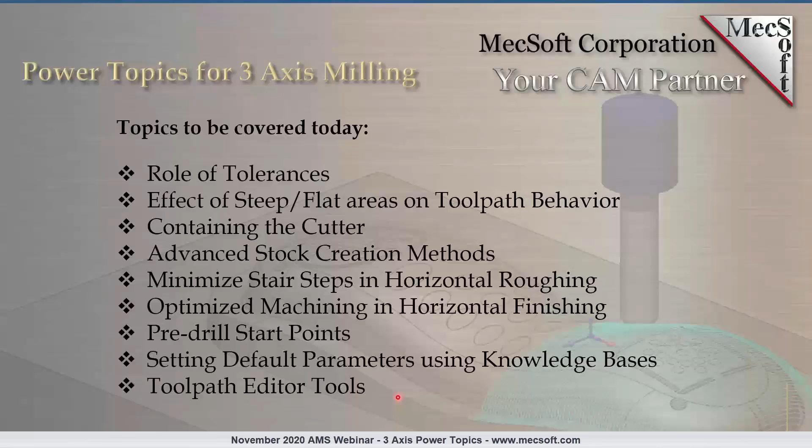We'll start by covering the first topic here, which is the role of tolerances. To demonstrate this, I'm going to first run through a few slides so you can see how tolerance affects your toolpath.

So the smaller or tighter the tolerance that you set, it'll reduce the chord segments, which improves the accuracy as you go smaller or tighter on the tolerance. This in turn results in more go-to motions, because the chord segments or distance between each point to point move of your toolpath is going to be much smaller. So depending on the part you're working on and the accuracy and finish that you need, you may want to set those tolerances accordingly in your roughing and finishing process when you program your 3-axis operation.

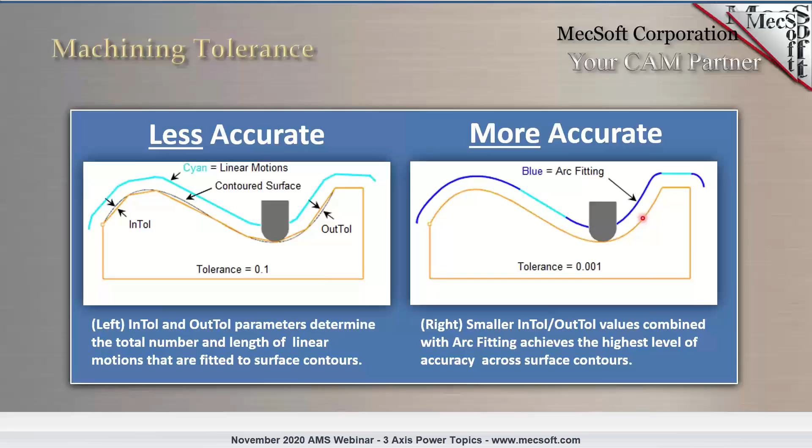Okay, so I have a core of a tray insert that is loaded in RhinoCam. As you can tell here, I have a few operations programmed. So the first thing we're going to take a look at is the role of tolerances.

So I have a horizontal roughing program. The part is in millimeter units. As we take a look at this toolpath, you will notice the effect of the tolerance, the chord segments are much longer or larger, as you can see here, with the default tolerance of 0.25 millimeters that's been set for the in-tol and out-tol, and the toolpath has been generated.

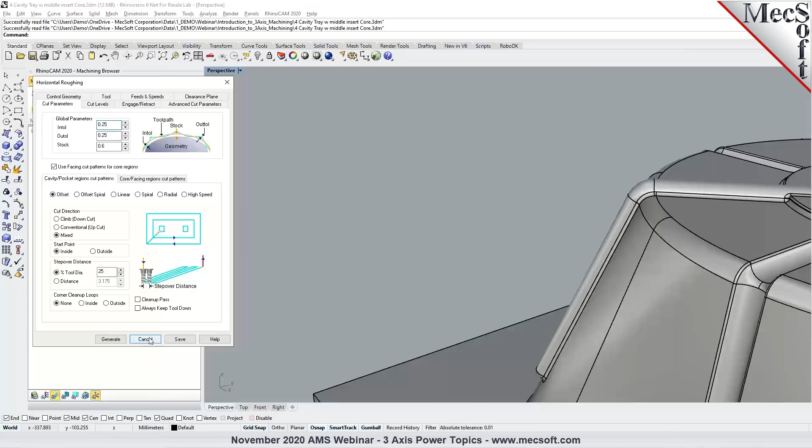So as we generate and simulate the toolpath, I'm going to run simulate to end, which is running through it, and you'll also notice the facets and the effect of the tolerance on the rough part in here.

Now, as we go back and tighten up these tolerances, I'm going to step through the levels before I tighten up the tolerance, so you can see for each of the levels the chord segments are much farther apart based on the tolerance settings that we put in.

If I go in and tighten up the tolerance to a value of 0.05 millimeter for our tolerances, you will notice the toolpaths are much smoother, resulting in much smaller chord segments and improving your quality of finish on the resulting part as you take a look at each of these Z levels in the roughing operation.

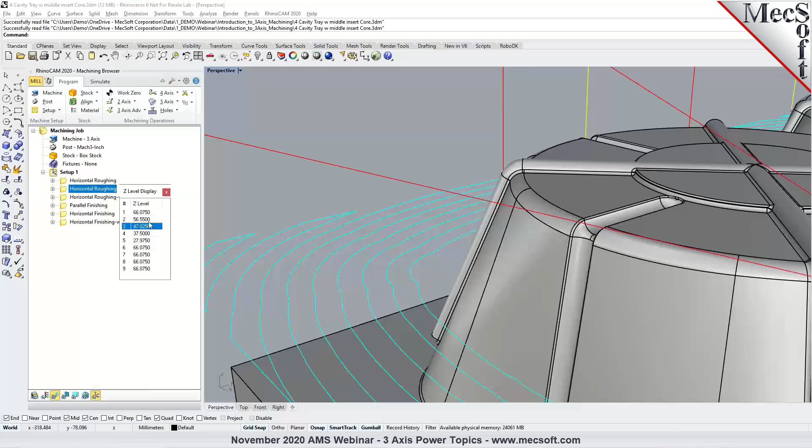Now the same goes with other operation types as well, finishing included. I'm just using the roughing operation as an illustration here for today's webinar, and I'm going to go ahead and run through the simulation for the roughing operation with a tighter tolerance.

So you will now notice the difference between the two, roughing with the slacker versus tighter tolerance, as you can see in the result of the simulation. This one you're noticing here is with a slacker tolerance, and this one is with a much tighter tolerance. Making the tolerance much smaller, tighter, will result in a higher accuracy finish, again at the expense of more lines of code, and the computation time would also be longer for a tighter tolerance.

Now, to fit arcs to your toolpaths, there are a couple of things you will need to do. One is you'd have to go into your CAM preferences and machining, and you would need to make sure output arcs as linear segments is not checked.

In your advanced cut parameters tab, you will need to set the arc fitting tolerance by selecting perform arc fitting, and you would specify the fitting tolerance to 2 times the tolerance that you specify for your in-tol, out-tol. So I have it set to 2 times, and then generating the toolpath will fit arcs to toolpaths wherever is feasible in the 3 principal planes.

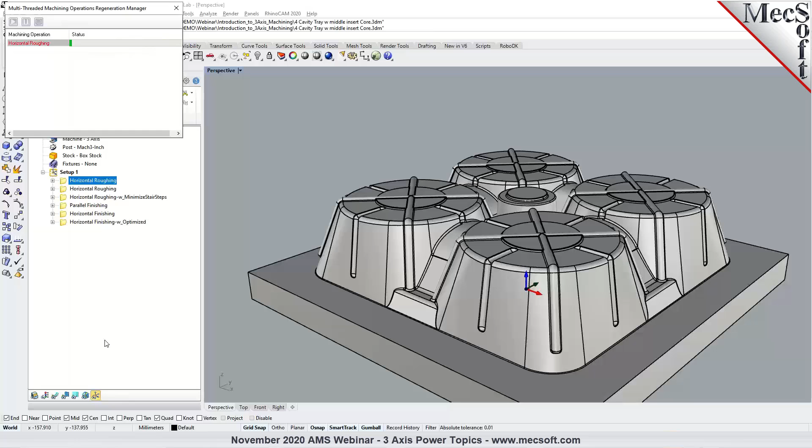So in this particular operation we've generated, we have a horizontal roughing, also known as Z-level roughing or roughing in levels. All of the toolpaths generated are in XY planes, parallel to the XY. You can see the arcs are being nicely fitted to the toolpath, and you can also set the maximum arc radius under CAM preferences and machining, depending on the max radius that your machine or controller is capable of handling.

Now I do have another example in here where you can see the same effect of tolerances. One with the slacker tolerance, you can look at the chord segments are much longer. With a tighter tolerance, it's more accurate and much smoother, resulting in a much finer finish.

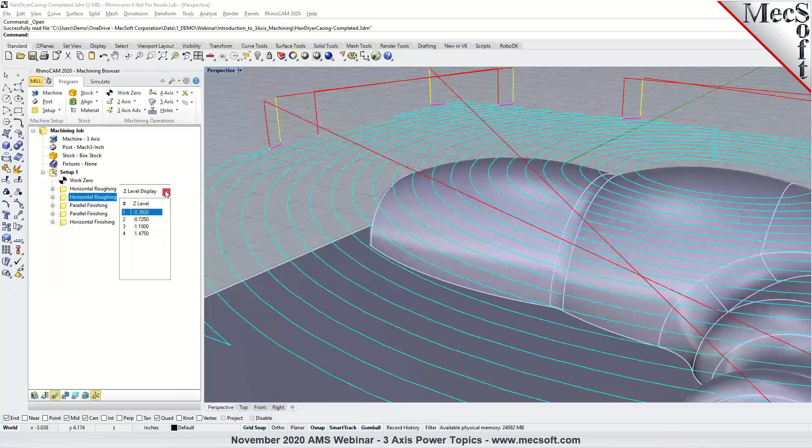Okay, so we will now move on to our next topic, which is the effect of steep and flat areas on toolpath behavior. To demonstrate this, I'm going to be using the same model here.

I have a parallel finishing operation program as part of the finishing or pre-finishing process. You'll notice that depending on the angle of cut specified in your parallel finishing - in this case, set to 0 degrees - the cutter traverses back and forth parallel to the x-axis.

As you run into steep areas on the model, you'll see that this leaves larger stair steps as the parallel finishing is riding up and down on these vertical walls.

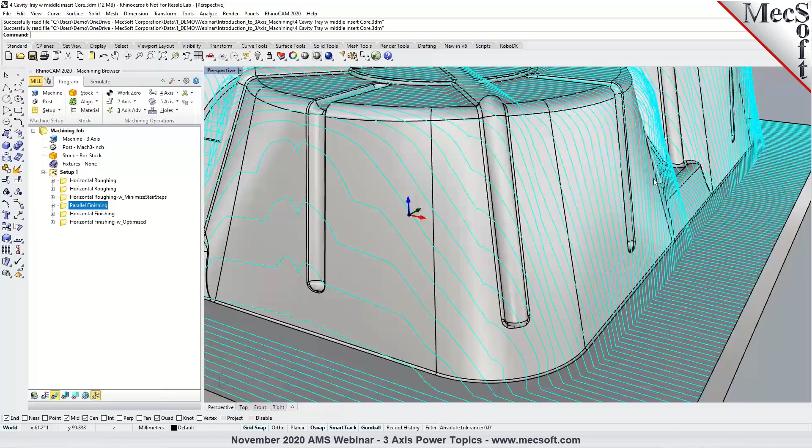Now, as you go along these sides, you'll notice it results in a much smoother transition in the parallel finishing operation. So to eliminate these steep areas and the scalloping you're noticing in the toolpath, you'll need to change the angle.

I just wanted to give an analogy of why we're seeing these jerky motions when going along close to the edge of a vertical surface. You can think of it as hiking along a very steep mountain, on the sides of the mountain. Even a very small change in your step could result in a large vertical drop. So that's what's happening here.

If you have a very steep surface and the tool is riding on the side of that steep surface, even a very small change in the normal direction of the tool can cause a significant change in the vertical axis of the tool direction. So that's what you're seeing.

So you've got to be aware of that if you're cutting steep areas like this, and if you go along that steep area like this toolpath illustrated here, you might see these jerky motions.

So thanks, Uday. Thank you.

So going along, as you notice, riding up and down on the walls is steep, but when you're going across, you get a much nicer transition.

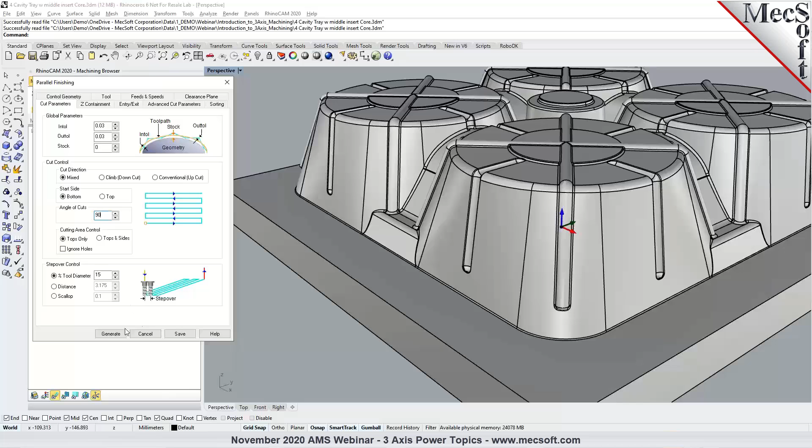So you can get a much cleaner finish on this side, but you'll notice the effect going along the steeper section on this side. You'd have to program one with a 0 angle of cut and one with a 90-degree angle of cut. You could contain them to specific regions by creating regions or selecting surfaces.

We'll talk about that later, but I just wanted to go over the effect of steep and flat areas on toolpath behavior with parallel finishing on this particular example.

Now I'm going to give you an example of the effect of steep and flat areas on a part where we can use horizontal finishing toolpaths, also called Z-level finishing. This particular part is much more free form or sculpted, where we don't have a lot of steepness or variation.

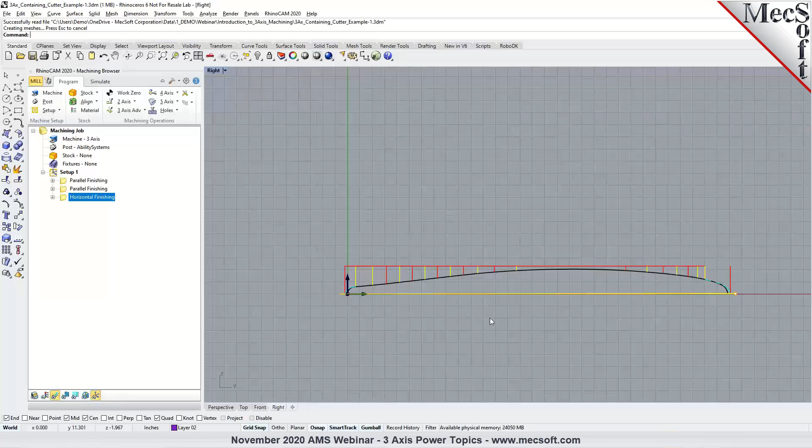Now, programming a part like this with horizontal or Z-level finishing is not the most ideal way, because Z-level is ideally used for steep sections - also known as a waterline finish, where you step down in constant Z levels. Since this part isn't too steep, programming Z-level finishing will result in much more gaps, spread further apart, even with a tighter step down distance set in the cut levels tab.

Conversely, I'd add that the part Uday showed previously would be better suited for horizontal or Z-level finishing rather than parallel finishing. So it's all dependent on the part shape or the configuration of the surfaces, and you've got to be aware of this.

Thank you. Thank you.

So the horizontal finishing has been generated on this particular part we looked at earlier, the core model. You can see the horizontal finishing generated on the part which is near flat, or we could call it freeform or sculpted, since there aren't too many steep areas.

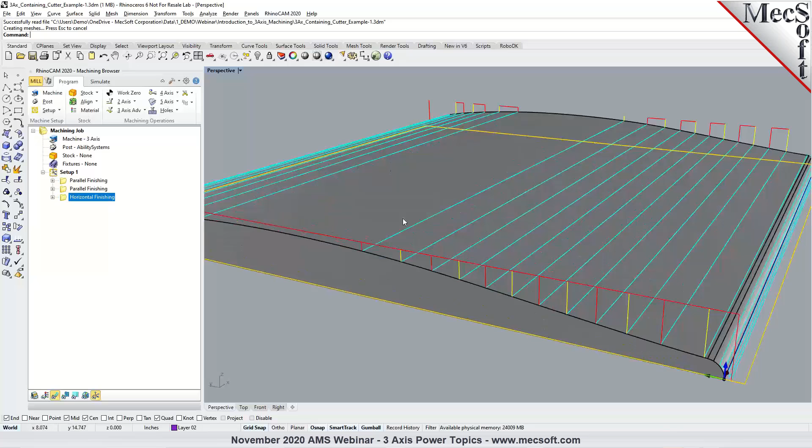Ideally, you would want to generate a parallel finishing toolpath or something similar on a part like this, as opposed to using a horizontal finishing toolpath. So a good rule of thumb would be, if your part is generally flat like this, you would use parallel finishing. And if your part is steep, then you would use horizontal finishing. That's a very good rule of thumb to follow.

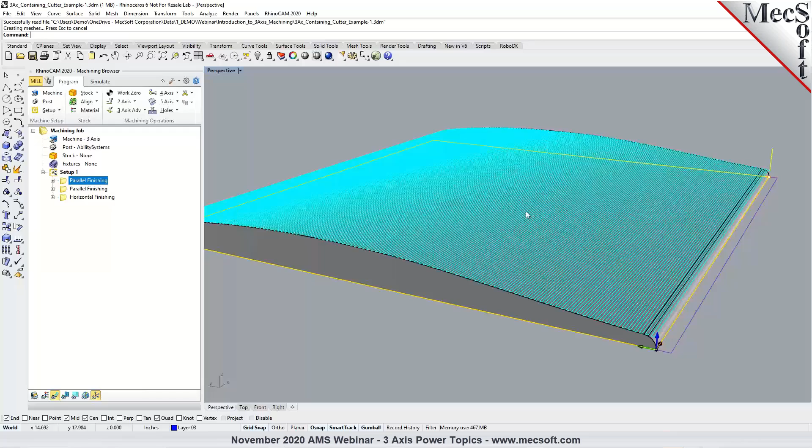To illustrate this, I'm going to be starting with this particular example, which we just looked at. Now, to be able to finish this part, you will notice that we have a region selected for containment, which basically extends up to the part extents in here. We have selected a containment region so that the toolpath can be generated for the entire part.

Now, as we select a containment region, the tool tip stays up to the region in here, as you can tell by looking at the toolpath and the toolpath display. The tool tip stays up to the region.

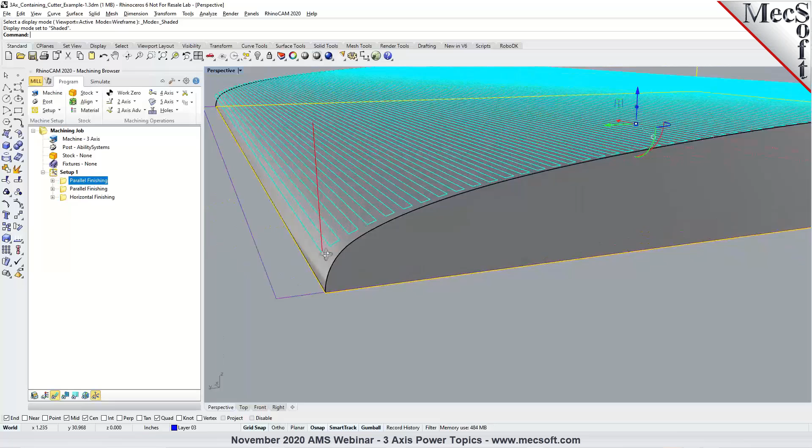So in this particular case, since we have a fillet or a radius surface towards the end of the part, you can tell that the cutter is not able to get all the way down fully on the side. So if I go into the toolpath viewer, you'll be able to see that the tool is not going all the way down on the side in here.

Whether you're using a ball mill cutter, the tool, you can take a look in here and see that it's not going all the way down. So in order to be able to cut all the way down on the side, we need to make sure that the region you're selecting is extended past the edge of the part by at least your cutter radius, if you're using a region or a curved region as your containment.

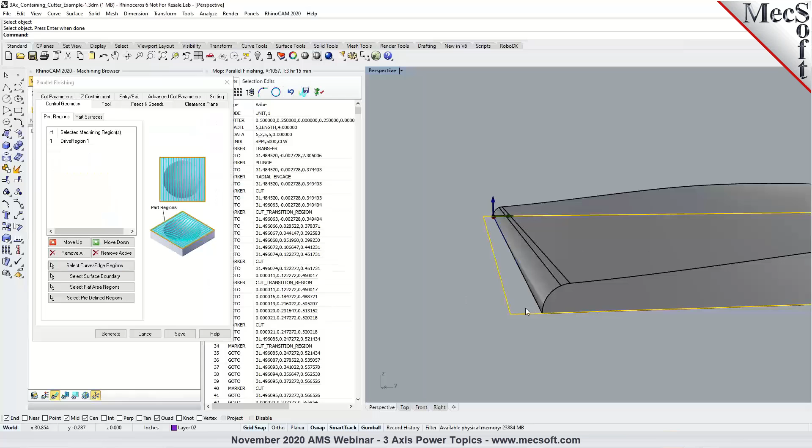So one of the ways you could do it is you can offset the region in your CAD. In this case, it was Rhino. I can offset the region and pick a region that's offset by at least the cutter radius and generate the toolpath. So you will see that the tool goes all the way down, cuts past it in here, goes past completely on the side.

Now, since I did not want the tool to go past on these sides, I did not extend the region over here. I just did an offset on one side, just along one of the directions. So on the y-axis here, the same goes over to the other side as well.

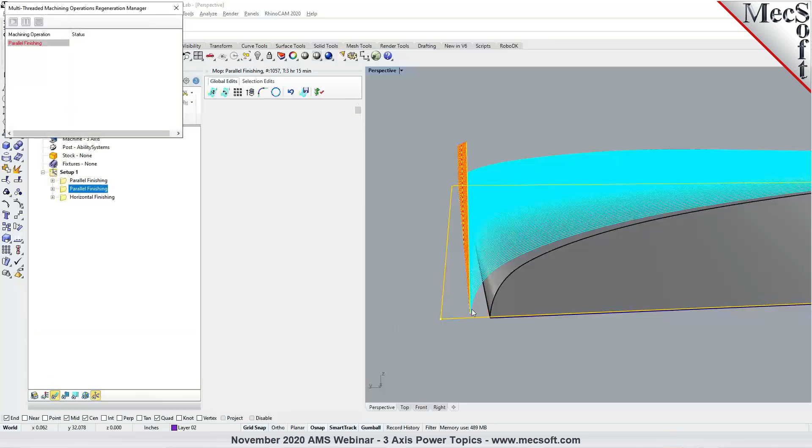Now I could apply the same when you're using cutting across at 90 degrees. You'll notice that the cutter goes all the way down, but it creates these retracts to the clearance plane. You're noticing this effect because there is no underlying geometry or surface for the toolpath to project down to. So basically when it gets down on the side, it retracts up to the clearance plane before it does a transfer.

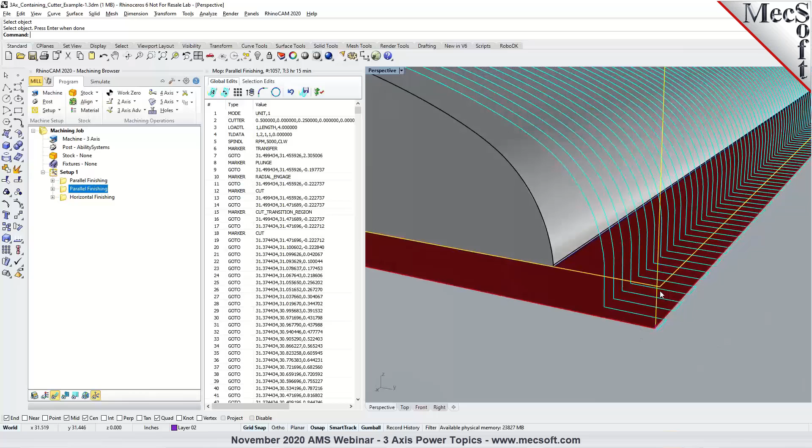Now there's a couple of ways how you can eliminate this. One of the ways is by inserting a plane. You can insert a planar surface, or it could be even a sculpted surface depending on the type of geometry you're working in. Generating or regenerating the toolpath will create a nice transition down to the floor of the surface that you created. And the toolpath stays contained to the curve that you've selected, which is the offset curve.

Now you can alter this plane in here. You can select it, and if you want to move it up slightly, in this particular case, I've chosen the plane to be down by the cutter radius so that the side of the cutter can fully get down on the side. As you take a look at it over here, I'm going to switch the tool to a ball mill. I had it on a flat mill for some reason.

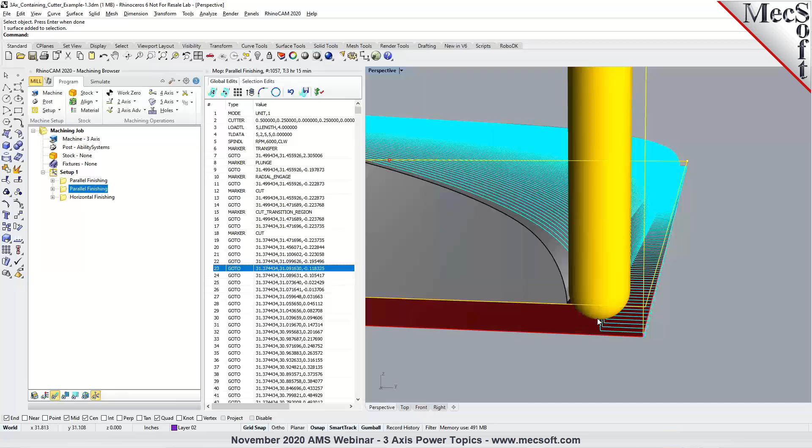So if you take a look at it here, it gives you enough room for the cutter to get down all the way down on the side to be able to cut it fully. So you want to make sure that you basically move the plane so it's at least past by the cutter radius if you're using a ball mill, so it basically clears all the way down to the edge.

If you move the plane up in the Z, I'm going to turn off the snap and just lower it down slightly below the part, and then regenerating the toolpath will automatically stay up to the plane.

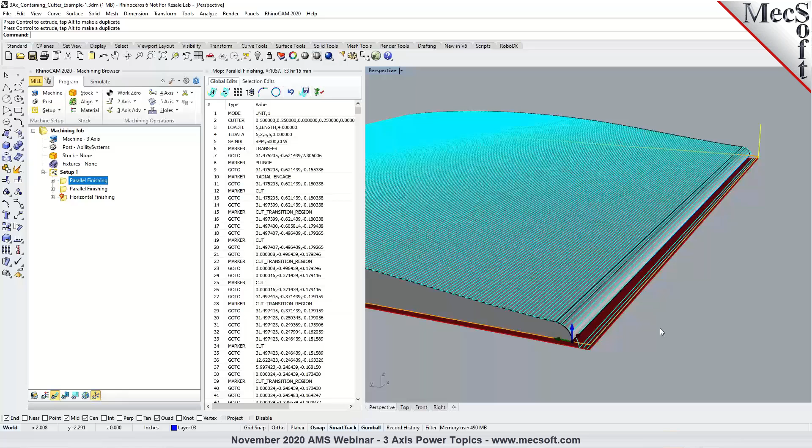The same thing goes whether you're cutting at an angle of cut of 0 or 90 degrees, you'll have the same effect. To be able to cut down fully on the sides, you'd want to make sure that you offset it by the cutter radius. That would be the minimum distance you want to offset away from the edge. This would be helpful in parallel finishing operations, for any type of part that you're working with. This is just an example to illustrate that.

I'm now going to go over a few other cutter containment examples.

You said a couple of things to eliminate the retracts. The other easy one would be to use the skim. Absolutely.

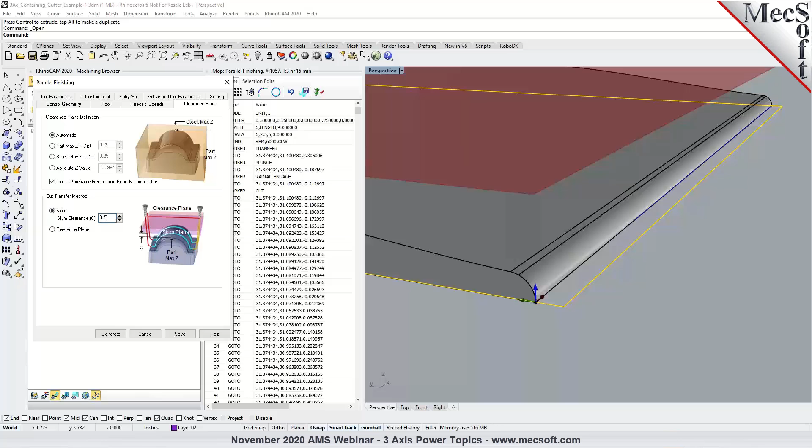So we'll generate this toolpath again. I apologize, I forgot, I missed it out. In the clearance plane, we have a cut transfer method. We can set it to skim or clearance. The default choice is clearance, so you can change that to skim and specify a small value. I can put in like 10 thousandths, and that'll basically just retract 10 thousandths above, resulting in a skim transfer and not retracting all the way out to the clearance plane.

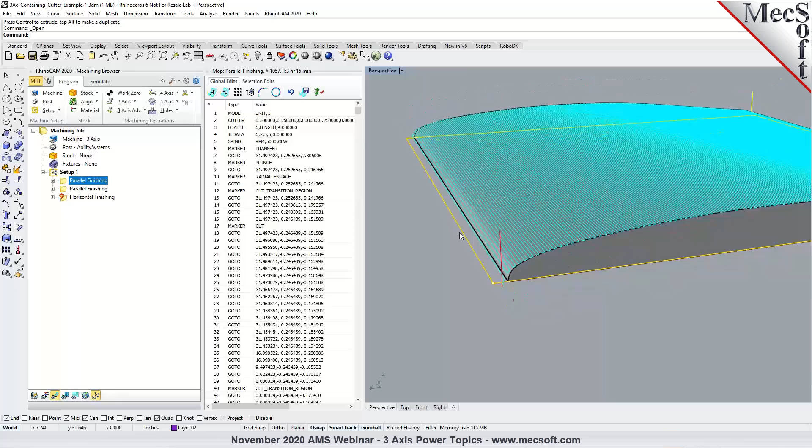The same thing can also be set whether you're cutting along 0 or across. In this particular case, you wouldn't have much effect on the skim clearance because you're going parallel to the x-axis, which the angle of cut is set to 0. You'll see the effect more when you're cutting across, as you're riding down the fillet or the radius here.

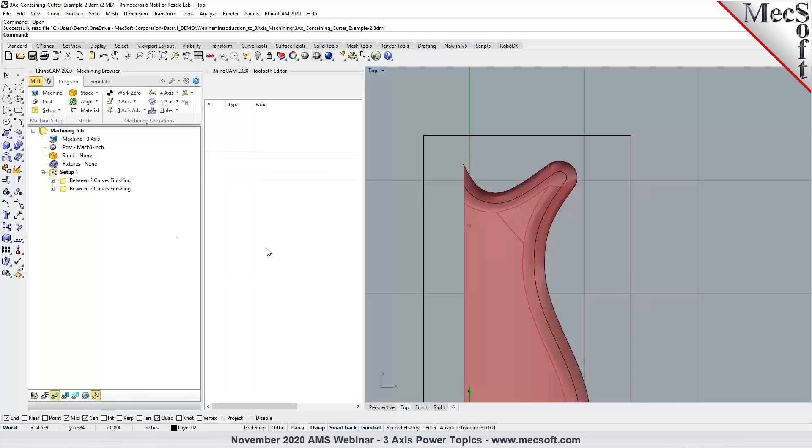Okay, I'm going to go over to the next example, which will cover the effect of containing the cutter. So here I have basically a half section of a guitar body, and these fillet sections here are steep sections. I have used a method called between two curve machining to program this.

Now this between two curve machining is part of our advanced 3-axis methods. It's available in our Pro and Premium configurations of our mill module. The toolpath morphs or flows between the two curves, and the toolpath is being projected to the 3D model.

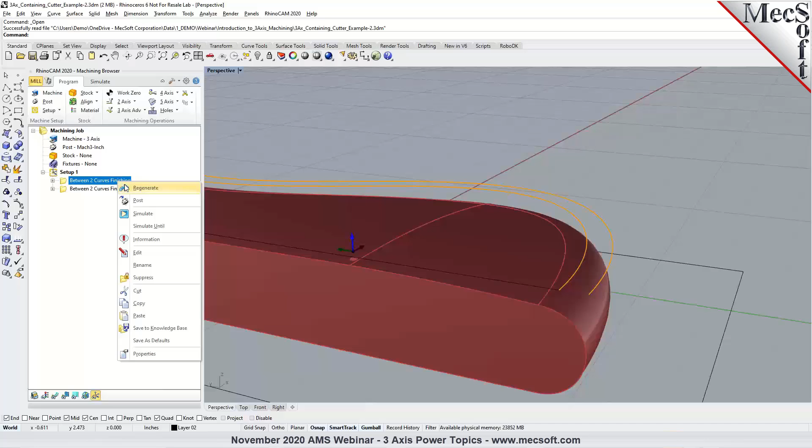In this particular case, I have selected two curves. One curve is on the edge where the fillet begins, and the other curve is where the fillet ends. Selecting these two curves and generating the toolpath will result in this toolpath.

However, the cutter is not able to get all the way down on the side. So similar to what we did in the case of parallel finishing, we will need to create a curve that's offset away from this edge by at least the cutter radius, and then generate the toolpath.

Generating the toolpath here, you'll notice that the toolpath goes past the edge and cuts all the way down. However, the toolpath is riding up and down, and since there is no surface or geometry to project down to, you're going to see this shakiness in the toolpath because you don't have any surface geometry or part geometry underneath it.

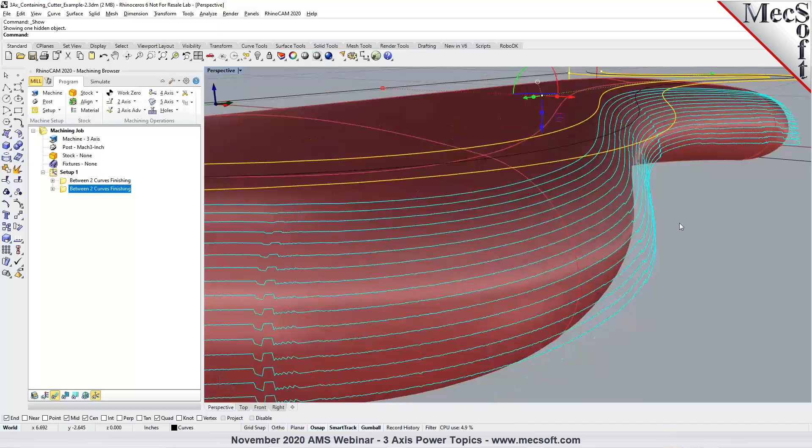So again, creating or inserting a surface at the bottom. The surface could be planar or sculpted, and generating the toolpath will eliminate this shakiness that you're noticing with the between two curve machining operation.

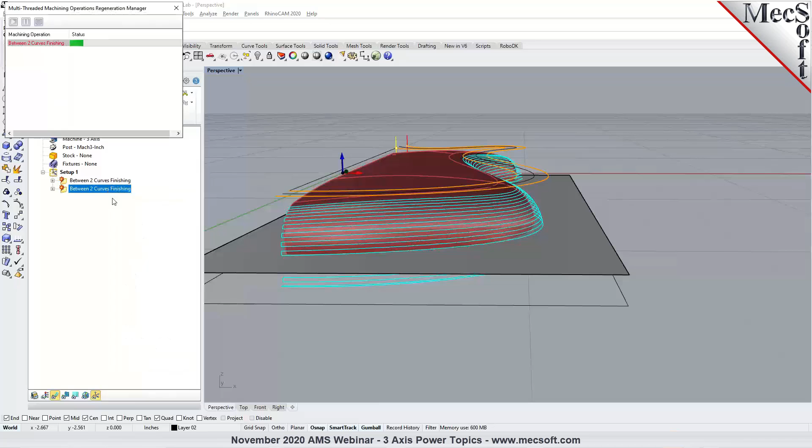This plane that you create can be set wherever that's appropriate. If you only want to go halfway past the model, I can move the plane up in the Z axis and then regenerate this toolpath, so the toolpath will not cut beneath the plane.

The next example we're going to take a look at would be one with a horizontal finishing toolpath, on a similar type of model. Again, we would like the cutter to go past this edge where the fillet ends, so you would want to make sure that you create a curve and offset it away from the edge by your cutter radius.

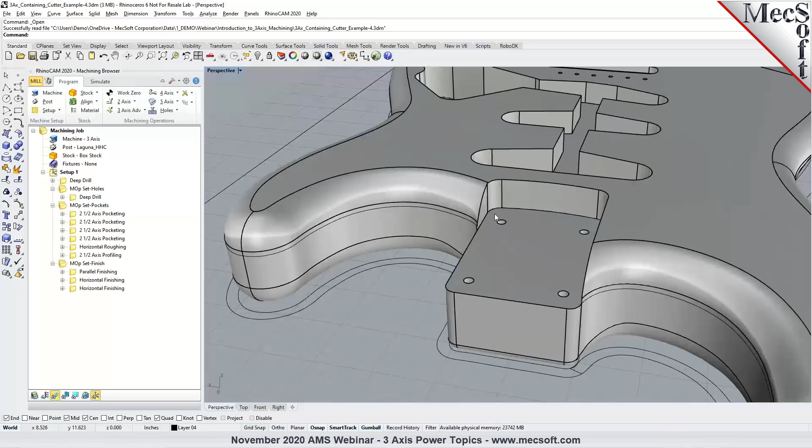In this particular model, we would also want to make sure that the cutter stays away from this pocket region. So what we have done here is created a closed curve region that stays away from the neck pocket of this guitar body.

Generating your horizontal finishing toolpath by selecting that particular curve region not only cuts and finishes the fillet radius all the way down to the bottom, we also have a Z containment specified in the cut levels, so as not to cut below a certain Z depth. It also stays away from the neck pocket.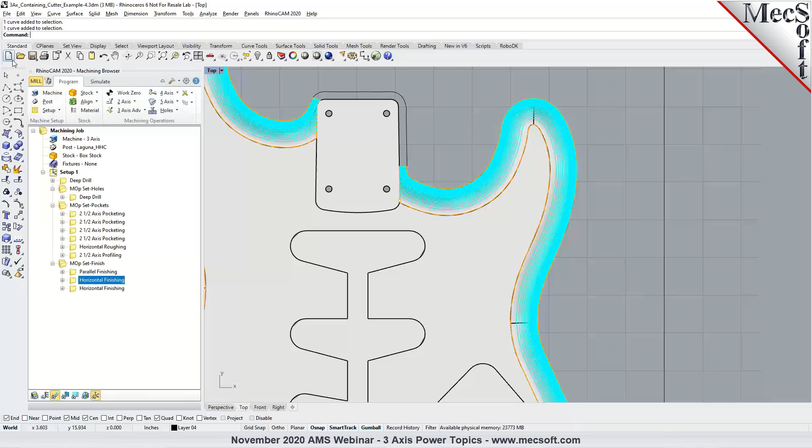So you could create these curve regions to contain the cutter to specific areas when generating your 3-axis toolpaths. Now let's go ahead and take a look at another example.

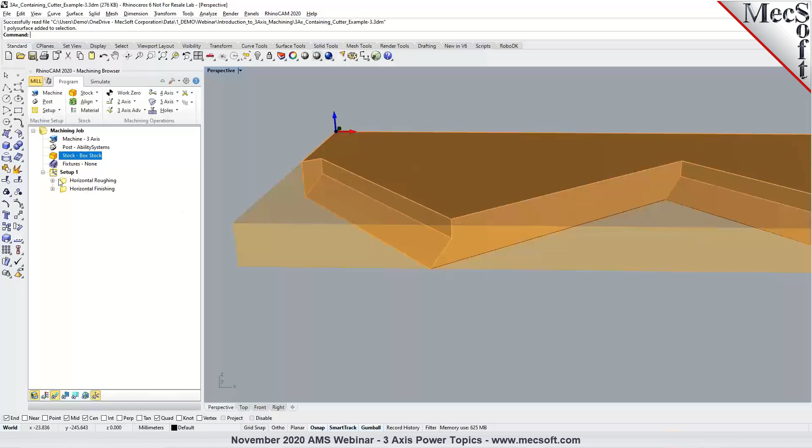In this particular example, you can see that the part has vertical walls in most areas, except there's a draft in two of these sections. So we've selected the silhouette around the part as a containment region, as we have the stock defined as a rectangular piece of stock, a box stock. So to contain the cutter just to the part extents, I've chosen a containment region that represents the silhouette extents around the part geometry.

Doing so will result in the cutter not being able to get all the way down on the sides. So if I go back and run a simulation, you'll see that the cutter is unable to go fully down to the bottom, and it leaves more material.

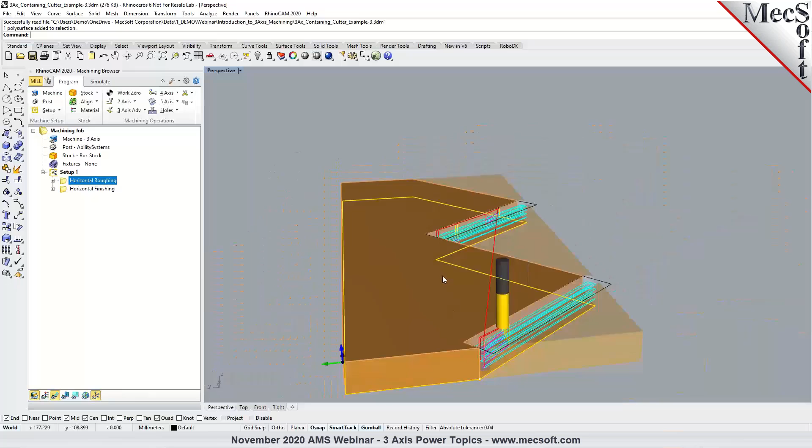Now, to be able to effectively program this, you would need to create a region and offset it out in the areas where you need to cut all the way down to the floor. So I'm going to go back and reselect my containment region. I have two rectangular regions drawn here, and generating the toolpath will allow the cutter to go all the way down to the floor.

So the roughing operation takes into account the stock that's being defined and looks at the part geometry where the material needs to be removed.

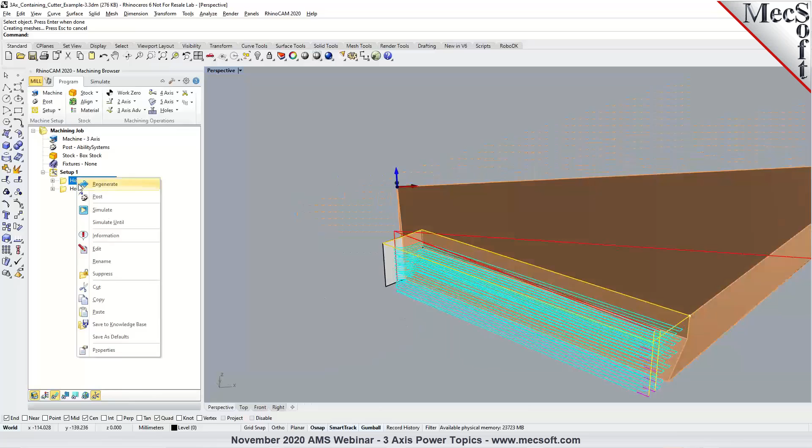Now, if you do not want the cutter to roll over around this edge, you could insert or create a simple surface like a wall here, and regenerating the toolpath will treat this also as part of your part surface and avoid the cutter from rolling over.

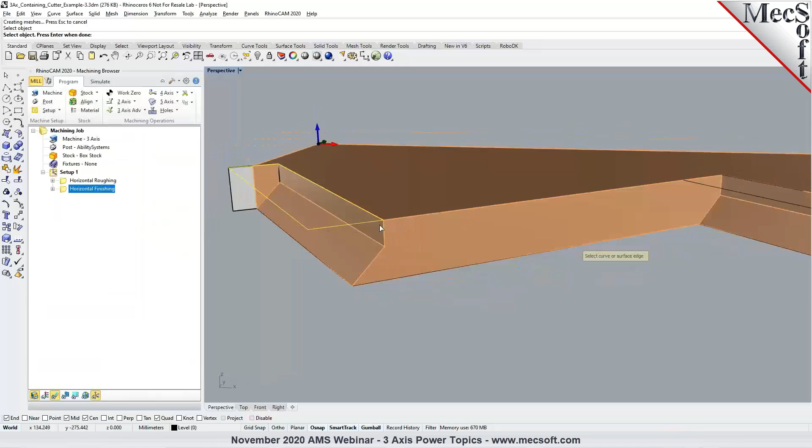Now the same technique can also be applied with finishing. In this example, I have a horizontal finishing programmed, and as you can tell, the cutter is not able to get all the way down to the bottom on this drafted or tapered wall in these two sections. So we will go ahead and modify and reselect the region, the one we've offset here, pick these two and generate the toolpath.

So this allows the cutter to cut all the way down on the side.

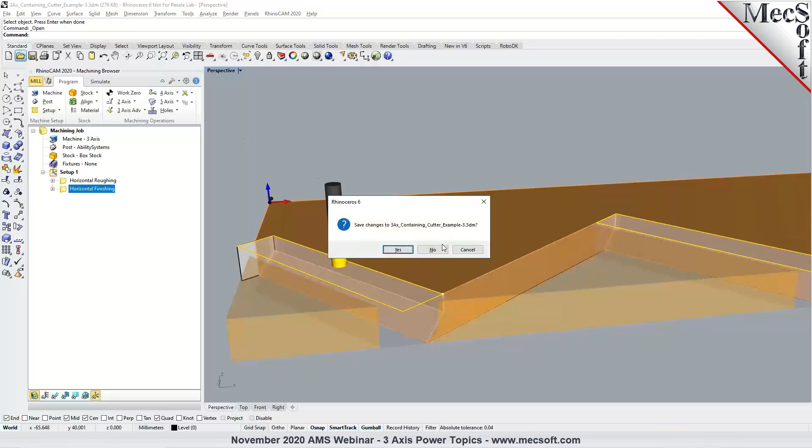I think the main takeaway from this region and containment section is that you can get quite creative with creating geometry and using that in machining for containment. Not only regions, not only curves that we call regions, but also surfaces, containment surfaces like the plane that he created. You're not necessarily restricted to planes—you could do sculpted surfaces as well. So you can be quite creative based on the type of parts you're machining. That would be the biggest takeaway from this section.

Thanks, Uday. Thank you. Also, we could select part surfaces as control geometry. In this example, I'm going to use a 3-axis radial machining toolpath. We can pick part surfaces, and you can actually select one or more surfaces.

As you specify a tool and generate the toolpath, based on what you set for the surface extent condition, you can have the toolpath either stay onto the surface, go past it, or keep it to the surface. So you have three different controls here.

Surface extent on means the tooltip stays up to the edge of the surface. Selecting past will go past by the cutter radius and automatically checks for the adjacent surfaces—it automatically gouge checks for adjacent surfaces.

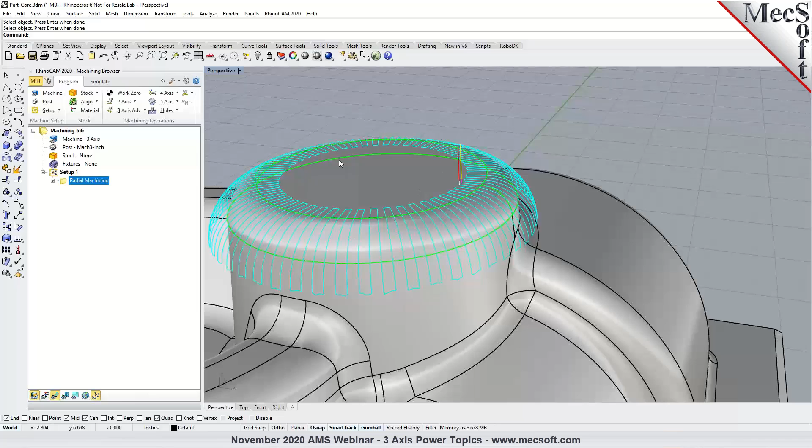So you can do surface selections, not just curve regions. You can also pick surfaces as part surfaces for your containment regions, and choose the surface extent condition to past, on, or to, depending on what you're looking to accomplish.

Okay, so we'll be moving on to our next topic: advanced stock creation methods. There are several different ways we could create stock geometries. With our Pro and Premium configurations, we have 3 additional stock types: part offset stock, extrude stock, and stock from selection. We'll be covering these three.

We've already covered the other stock types in our earlier webinars, so today we'll be focusing on part offset stock.

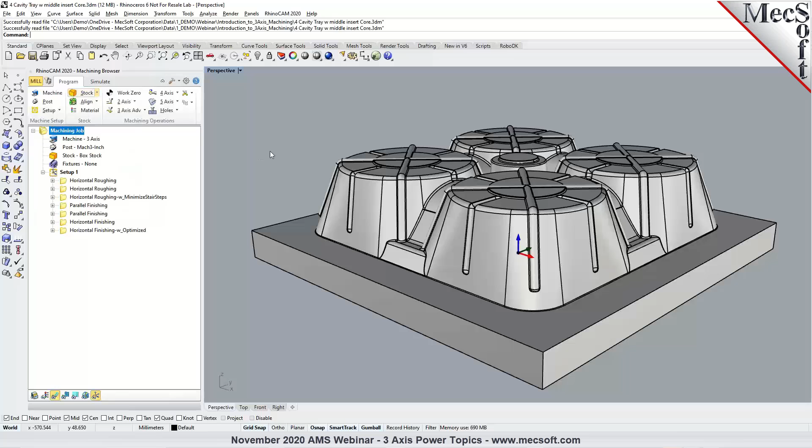The part offset stock is useful when you're working off of your casting. If your initial stock is going to be a casting you're working out of, rather than creating a box stock and roughing it out, your casting would typically be an offset of your finished part itself. You can specify a radial offset distance in the part offset stock, and picking OK will create a stock that's a true 3D offset of your actual part geometry.

This particular part is in millimeter units, so I put in a radial offset distance of 0.5 millimeter. I'll display the stock visibility, and if you go to the simulate tab, you'll notice the part offset stock is generated. When I create a roughing toolpath, the part offset stock is what's taken into account for generating the toolpath, so you're minimizing unnecessary cuts or cutting in air, making it much more effective for your finishing process.

The part offset stock is available in Pro and Premium configurations of our mill module.

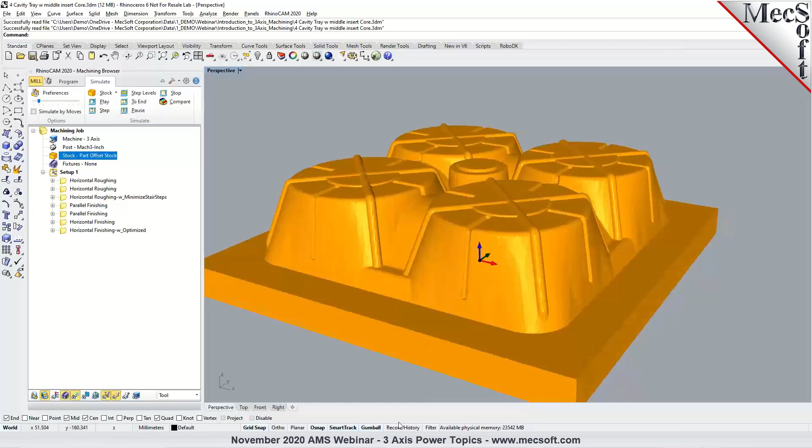The next stock types we will cover here today are stock from selection and stock from extrusion. I'll cover those two in just a moment using another example.

In this particular part, what I have here is a core model. You could be working with stock materials like MDF or foam that may be stacked up to form the actual shape of your part. You could model those in your CAD—here it's modeled in Rhino—so basically I have a stack of material stacked up where there are just features that need to be machined, saving your raw stock material for milling.

You could define your own stock or model your own stock, then place it on a layer in your CAD. In this case, I've created a layer called stock and placed this solid model on a new layer. I could highlight or select this geometry, then go into stock and select stock from selection, which will create a stock from the selections you made.

This feature, stock from selection, is available in Pro and Premium configurations of our mill module. A few things to mention: the geometry you're selecting has to be watertight, meaning there aren't any open edges. It needs to be a closed poly surface or a closed mesh—we could select either closed meshes or closed poly surfaces as geometry for defining stock from selection.

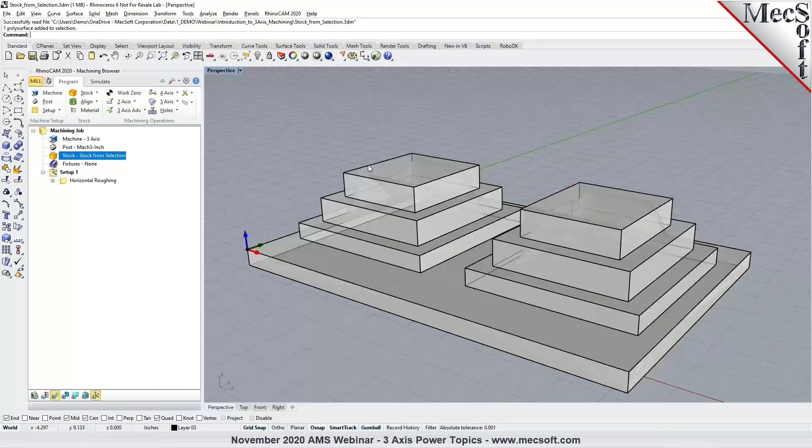Once you've defined the stock, it's now displayed in RhinoCam. The next step is to make sure you hide this solid model, or if it's on a different layer, turn off the layer visibility. When you do, you're actually viewing the part, and as you select setup and highlight stock visibility, you can see both your stock that's defined and the part.

Before you create a roughing operation, make sure you toggle off the visibility of the actual solid or mesh geometry used for defining your stock. Generating your toolpath will compute it based on the stock you created, so you're not cutting air, saving a lot of time and material. When I run a simulation, the toolpath is generated based on the stock from selection here.

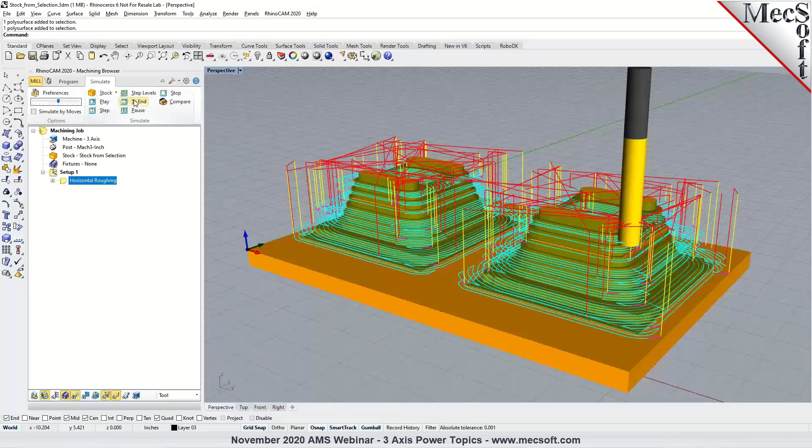When you're working with large scale models, and if you have stock made up of different shapes, you can model those stock shapes in your CAD and then generate the toolpaths by defining stock from selection. So there's a roughing process generated using stock from selection.

The next type of stock geometry I'd like to cover is stock from extrusion, also known as region stock. Let me delete the stock here. Stock from extrusion or region stock can be created by selecting planar curves—you can have one or more curves created. You need to make sure the curves are closed, and you can select these curves. I can hold Shift or Control to multiple select; if you're working in Visual CAD/CAM, you can use the Control key.

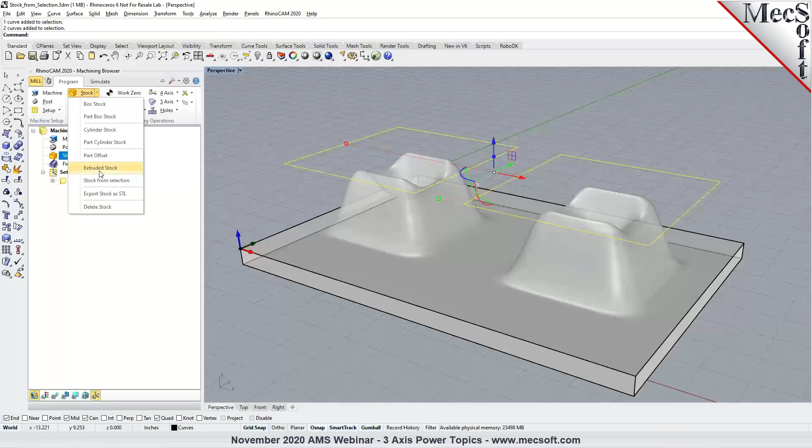In Rhino, you can Shift or window select curves and go up to stock and use extrude stock. The stock is basically an extrusion of the curve geometry you selected. You could specify a high and low Z, or automatically it'll determine the high and low Z based off the part. In this case, I can set the low Z to 0, pick OK, and the extrude stock or region stock is created. This feature is available in Pro and Premium configurations of our mill module.

Generating the toolpath will compute it based off the stock geometry that's been defined. You can see there aren't any toolpaths generated outside of the stock extents. Again, this is another way of defining stock for your roughing process.

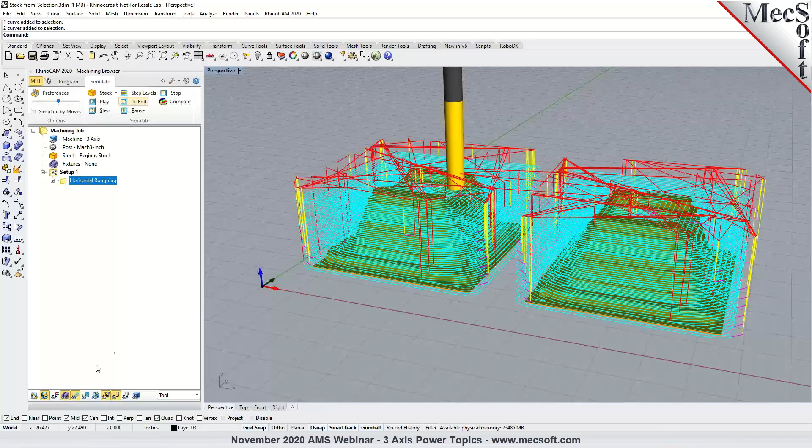You could also have a nested region for stock. For example, if I need to draw a geometry, I can put a hole in here and move it up to the same plane where this geometry is located. I could select these two curves and define stock from extrusion, so a stock you define can also have a hole or bore on it. With extrude stock, you can select multiple curve geometries to define your extrude stock.

We're now going to move over to the next topic, minimizing stair steps in horizontal roughing operation. I'm going to switch back to our original example, the tray core model. We've generated a roughing operation already and looked at its simulation earlier. You'll notice that with the roughing operation we've created, it creates stair steps like Z-level roughing, with large step downs for each cut level.

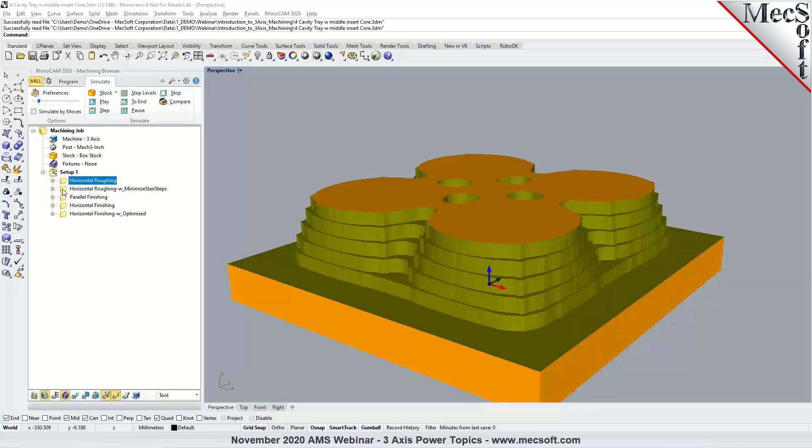One way to address this is to minimize these stair steps in horizontal roughing. This is a new feature available in our latest release. As you go into the roughing operation and go to the cut levels tab, you'll notice the minimize stair step option is available. This feature is available in Pro and Premium configurations, and you can specify the intermediate step down distance—setting it to 25% will be 25% of the step down distance.

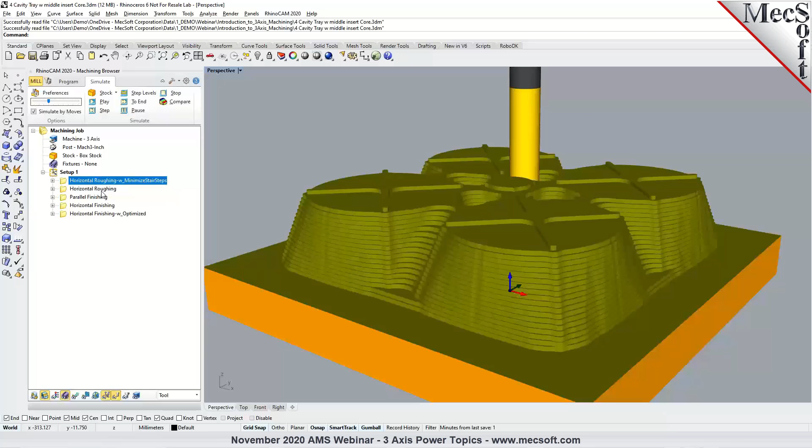Generating the toolpath will create the roughing toolpath in Z levels, then go back and clean up the stair steps, similar to a re-roughing operation. In the simulation, you'll see it does the first level and then works its way up to clean up and minimize those stair steps. Here's the simulation with minimized stair steps compared to without. This is an efficient way to bring the stock as close as possible to the net shape of the finished part in roughing, making it easier on the tools for pre-finishing and finishing.

Again, this minimize stair step option is available in the cut levels tab and is included in Pro and Premium configurations of our mill module.

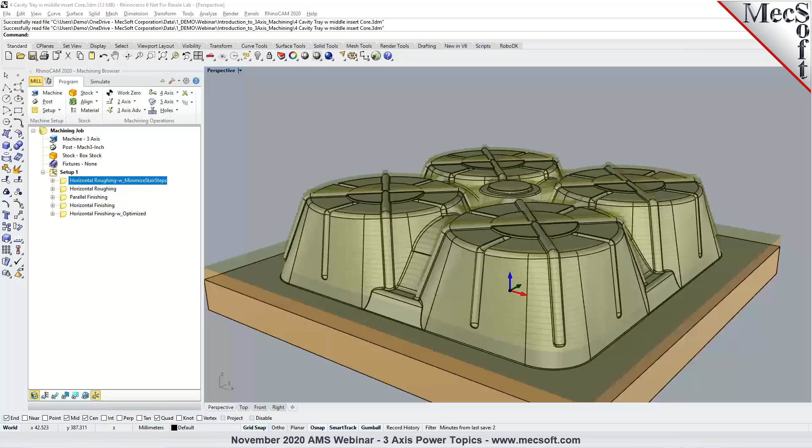We're now going to move to our next topic, optimized machining in horizontal finishing. Most of us have used horizontal finishing for finishing steep areas or Z-level finishing. Now if you have parts that also have flat sections you'd like to finish along with the steep sections, you could go into the horizontal finishing operation and select optimized XY machining. Selecting this and generating your toolpath will also generate toolpaths for the flats, resulting in an offset cut pattern.

As you can see, the optimized machining is generated on these flat sections on the top of the core as well as on the floor. I'm going to bring in another example where you can see the same thing in a cavity, how it works inside a cavity as well.

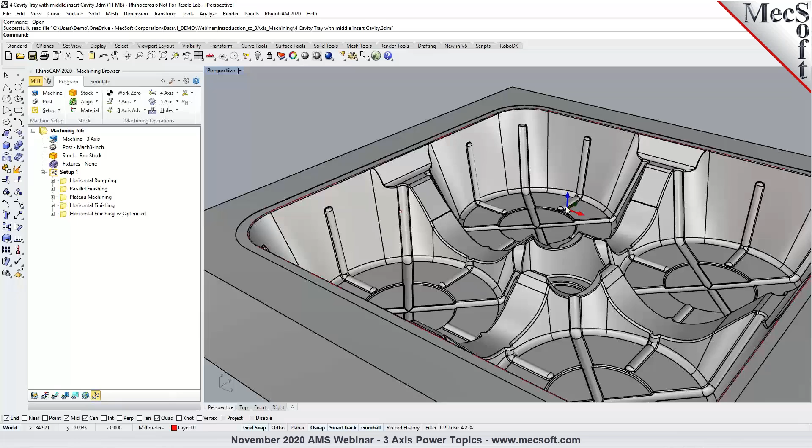So I have the cavity for the same tray part, and there's the horizontal finishing with optimized compared to without optimized. The optimized machining can be used for machining flat areas as you're stepping down in levels, generating your Z-level finishing toolpath. So to finish both steep and flat areas, you could use horizontal finishing with the optimized XY machining.

So there was a question on the minimized stair-step roughing. Can't you do that same thing with a smaller DZ, or delta Z, for each cut level? And maybe you can explain the difference between using very small cut levels to get that same effect as opposed to using minimized stair steps. Sure, we'll certainly do that, thank you.

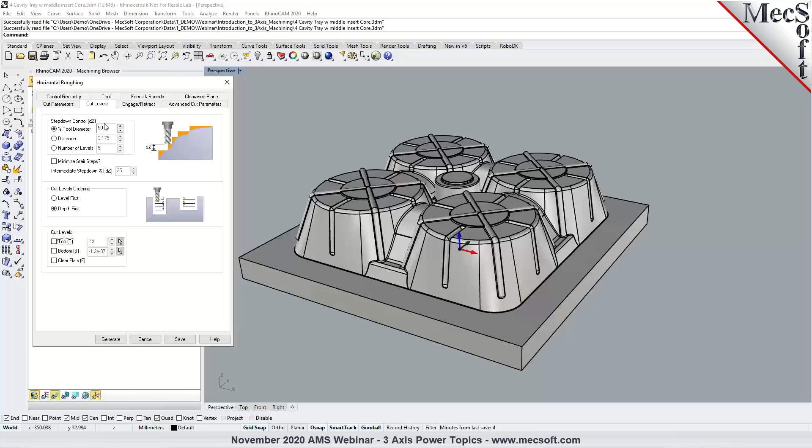So if you take a look at these two operations, I'll go over the information. You'll notice that the horizontal roughing with the current step down results in about 7,300 plus go-to motions. If we program the horizontal roughing with a much smaller step down, you're basically roughing the entire area of the stock and part with a much smaller step down, which results in exponentially much longer toolpath generation times.

If I set this to 10% tool diameter for the step down for each of the levels, you're basically roughing out the entire part at a much smaller step down, which adds more to your machining time. So it's probably much more efficient to use a larger cutter to clear most of the material out and then work your way up as you clean up the area.

So here I've used a much tighter or smaller step down for each of the levels. This adds much longer toolpath generation and machining time versus using minimized stair steps, where you generate it initially with much larger step downs, and then work yourself up to clean up just those sections around the model, like a re-roughing operation in between those stair steps.

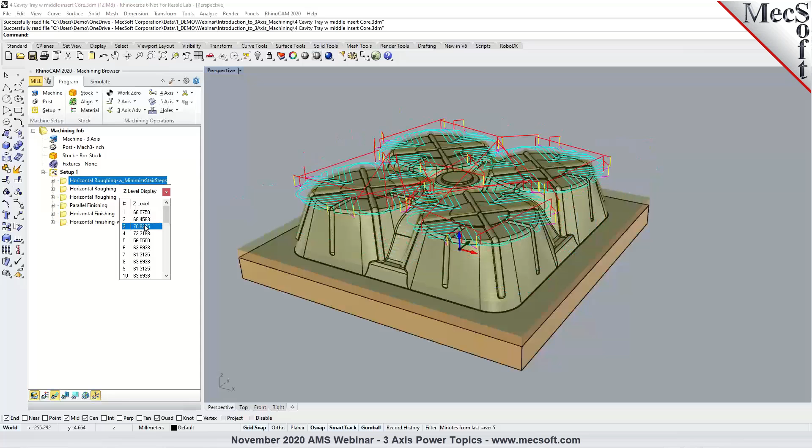So if I may add to that, what's happening in minimized stair step roughing is you're taking the maximum possible depth of cut with your cutter first, removing a bunch of stock with the maximum step down your cutter can allow. Then we use that in-process stock, since you've already cleared out a lot of material, to only go in and whittle away the amount you haven't removed in the preceding Z levels. So it's quite different from using a much smaller delta Z and machining the entire stock model.

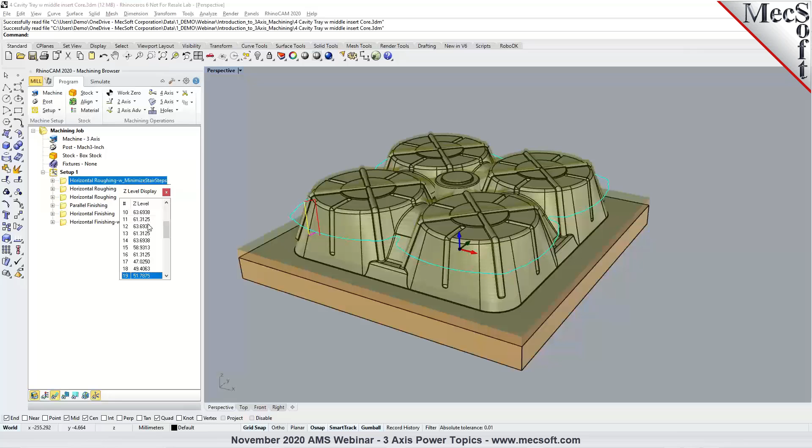Because if you're doing that, you're actually cutting the entire stock model for each delta Z. That's a significant increase in the number of toolpath points, that's what Uday is pointing out. So comparing the two roughing operations here, we're at 7,000, and if I use a delta Z of 10%, you're almost looking at 7 times, or just under 7 times, as many points, which exponentially increases your machining time. So minimized stair steps is the way to go, reducing the delta Z between each stair step so it does a re-roughing operation.

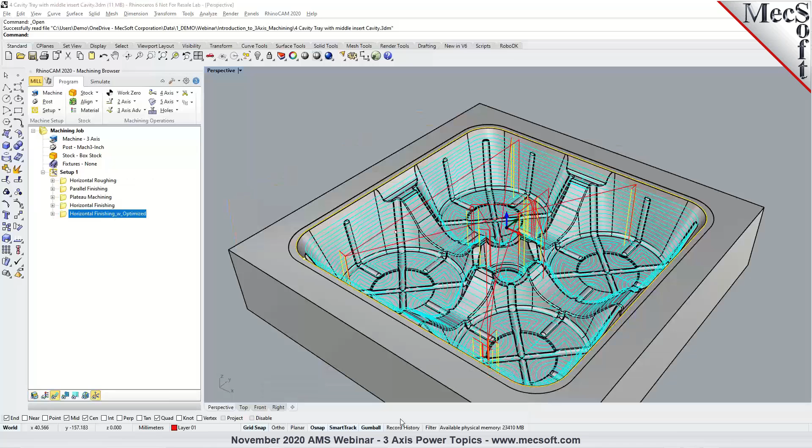Okay, so we'll move over to the next topic, which is how to use pre-drill points in 3-axis operations. In this example, I'm talking about a roughing operation. Considering we have this cavity that we need to mill, we'd like to pre-drill a hole so that makes it easier for the roughing process.

So I'm going to insert a hole machining and drilling operation to start with. I'll pick a drill point here, or I could pick a circle. In this example I'm using a drill point. We'll use a tool for the process, specify a drill depth, and generate the toolpath. So I'm drilling down 40 millimeters deep with an end mill, or it could be with a drill bit.

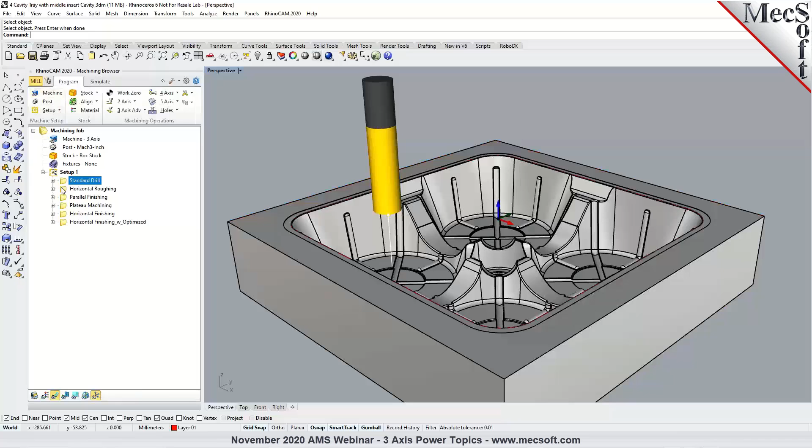So once we've done the drilling process, we'd like the cutter to engage or enter at this pre-drilled location at the start of the roughing operation. If you generate a horizontal roughing operation, the roughing toolpath automatically figures out the best possible location for the entry or ramp motion.

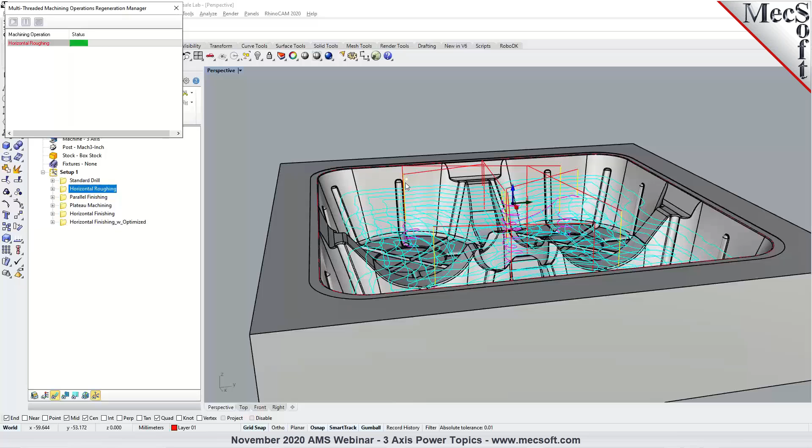However, if you wanted to use the location of the pre-drilled hole, you'd go ahead and edit the roughing operation, then go to the Start Points tab under Control Geometry, click Select Start Point, and pick the start point you used for your pre-drill operation. Now generating the toolpath will plunge or create the ramp motion at the point you chose for your pre-drill location. So it's automatically going to move your entry to the location of this pre-drill point, giving you control to specify where you want the cutter to enter on the roughing.

Now this can also be done for both roughing and re-roughing operations, picking the start point, so the cutter ramps in at the pre-drill location for each of the cut levels.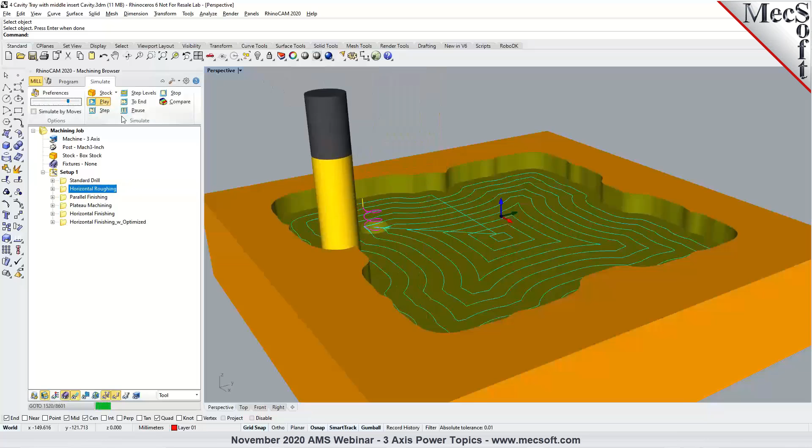All right, so let's move over to the next topic here in today's webinar, which is setting default parameters using knowledge bases. A lot of the times as we program our machining operations, we would like to use a certain set of parameters. When we go up to the machining methods, in this case 3-axis, if I choose horizontal roughing, I would like to use a certain set of parameters. For example, for the clearance plane, I may want to use stock max plus a distance of, let's say, 5 millimeters. I would prefer to use a skim clearance at all times.

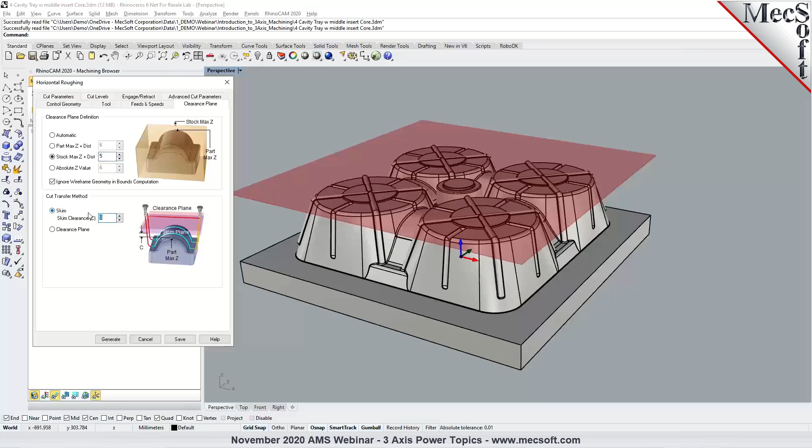I'll specify a skim height, and cutting parameters, like I could set my tolerances to a certain setting at all times and the stock to leave. So each of these parameters that you're inputting, you're basically repeating this over and over again for each and every time you're trying to generate any operation. All of the mop parameters that you're specifying have to be keyed in or inputted each time. So as you go through the process of entering, this repetitive work can be eliminated by defining or setting up defaults.

To set a default, once you have a machining operation created, you could right-click on the operation, and then from the menu that shows up, you can choose Save as Defaults. As you click Save as Defaults, you'll be prompted with the Save As dialog, and it automatically points you to the defaults folder, the default directory, and I can give it a name. For example, I can call it default knowledge base 1, and I pick Save.

So now the mop parameters for the horizontal roughing operation that we just inputted are now saved to the default knowledge base. So the next time I go ahead and program a roughing operation, whether it's the same part or a different part, I go up to 3-axis and roughing, and you will notice that the parameters you saved in defaults are automatically loaded. So you don't have to go through the process of re-entering each and every parameter. Your default settings are being saved in here.

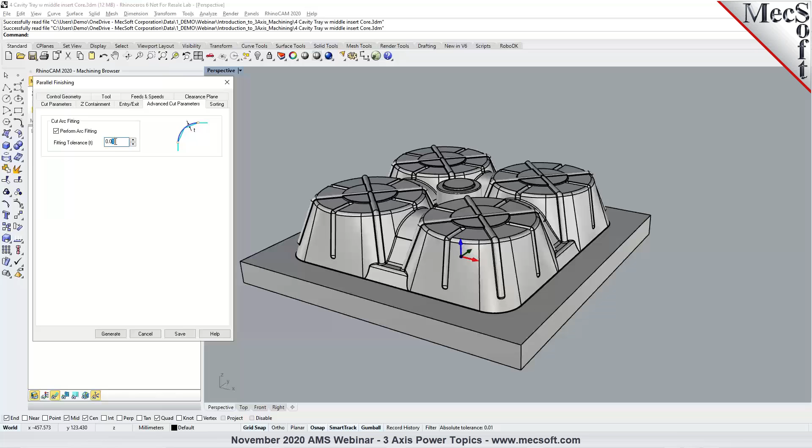Now going to this parallel finishing operation, I may want to use certain settings each time. For example, I would want to tighten up my tolerances, reduce my step over, leave my angle of cut, change it to 90 degrees. And then I can also still do the arc fitting in the advanced cut parameters, and then generate this path.

Now, once you've set the operation parameters and generated it or saved it, you can right-click and choose Save as Defaults, and it automatically updates the defaults knowledge base file for the parallel finishing operations. And when I go into creating a new parallel finishing operation from the menu, you will see that it automatically loads the parameters from your defaults that you just set.

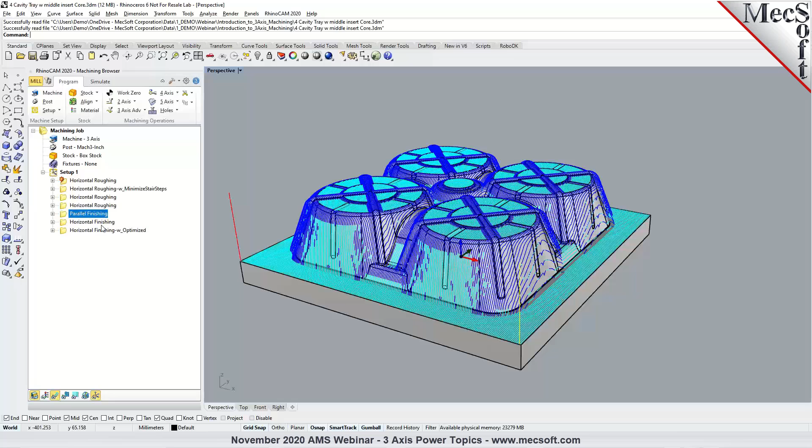Now I could do the same thing for horizontal finishing. Right click, Save as Defaults. So all the parameters we set now are saved in the defaults file.

Now if I go ahead and pick a different file, I'm going to go back and choose a different example. One moment here. Okay, so I'm going to go ahead and pick a different part, and you'll notice that the part is in millimeter units. If I go ahead and select 3-axis horizontal roughing...

You'll see that the parameters are being loaded from your defaults, whatever you set. So this basically eliminates the need for you to go back and re-enter the parameters you'd like to use, over and over again. And you can have the defaults set for each and every operation type.

If you go back to an operation that you already saved into the defaults and right-click and say Save as Defaults, it's going to update the defaults with the new settings. So you can have a default for each operation type. You can have it for roughing, parallel finishing, horizontal finishing, 2-axis profiling, pocketing. For each and every operation type, you can have the default set and saved. Now this default is actually being saved and automatically loaded in your ProgramData folder.

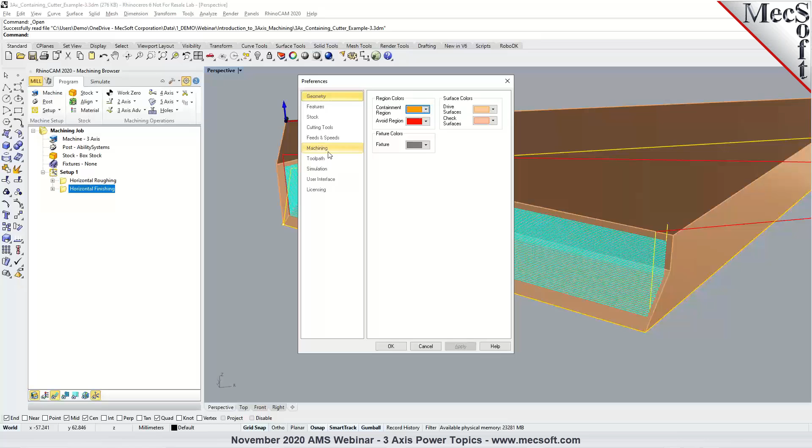As you go into the CAM preferences and machining, you will notice that the last default knowledge base you chose is automatically set to be loaded at the start. Now, if you want to revert it back to the system defaults, you can select the pull-down menu and change this to undefined. This will set it back to the factory or system default settings. So you can switch this back from the one you chose to undefined and pick OK, and now it reverts back to the system default settings, as you can see right here.

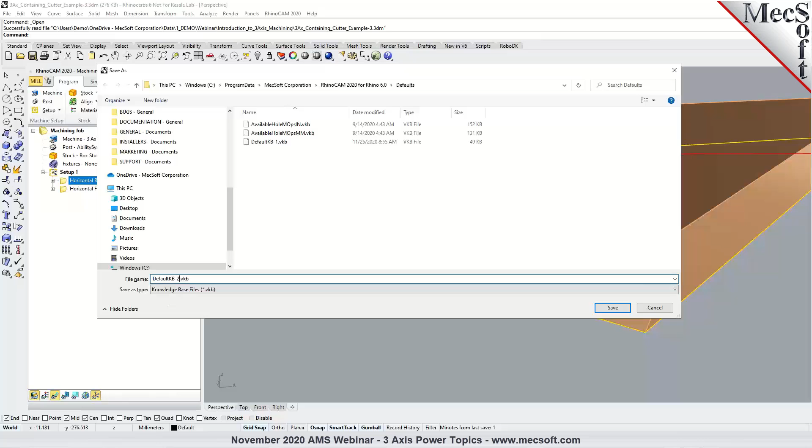Now, if I want to create a second defaults for a different type of material you're cutting or process you're using, you can set it to undefined, make your changes to the parameters in here to apply these changes, then right click and choose save as defaults, and give it a new name. I can say default knowledge base 2, or name it based on the material you're cutting. So we now have 2 default knowledge bases set, and the last saved default settings is what gets loaded here.

You can choose which default knowledge base you would like to use before you start creating your toolpaths. I can pick from knowledge base 1 or 2. So if I go back to knowledge base 1, as I create new operations, it's going to load the settings from the default knowledge base.

And the way you can organize defaults, you can get quite creative also with that. We've seen users organize default parameters based on tool size, so maybe you're interested in setting particular default parameters when you choose a particular tool, and you could save the default knowledge bases based on the tool size. Or you can save it based on the material you're machining, or even the kind of parts you're machining. Maybe you're getting guitar body parts and you wanted defaults for guitar body parts, and then maybe ukulele body parts or something else. So there's quite different ways you can organize defaults and use it - your creativity is the only limitation there, we feel.

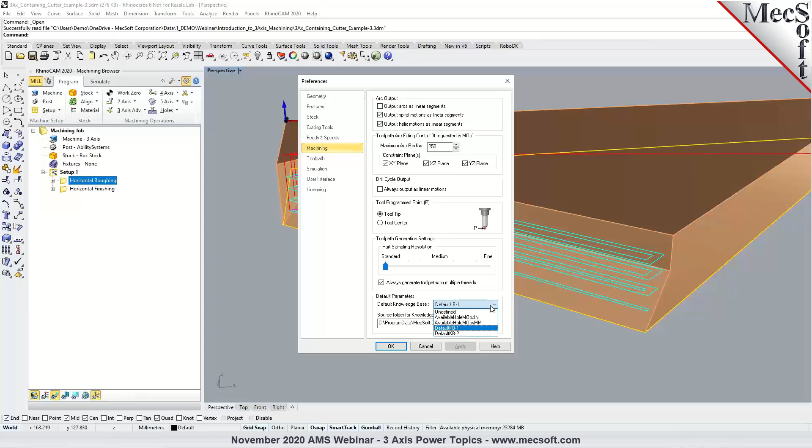Also, if you're working in inch or metric units, you may want to make sure you have separate default files saved, because these are default knowledge bases, so you don't want to mix and match them. You can have one for a set of inch or English parts that you're working in, and one for metric or millimeter parts that you're programming. So you can have 2 different default knowledge bases, and choose which one to use before you start programming, just by going to CAM preference and machining.

Okay, the last topic for today is basically Toolpath editor tools. This is a very useful tool that's available in our Pro and Premium configurations of our mill module. The Toolpath editor tools can be accessed by going into the Toolpath object from any one of our machining operations. So I can double click on a toolpath and access the Toolpath editor. There are 2 tabs in the Toolpath editor, called Global Edits and Selection Edits. These tabs will appear if you have Pro or Premium configurations of our mill module.

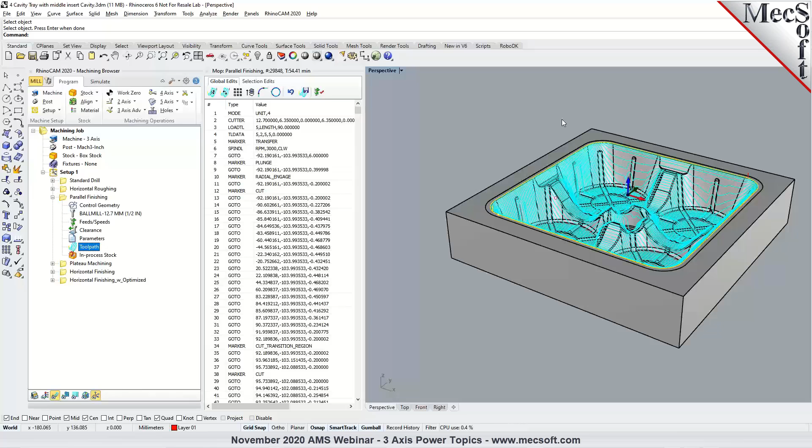Now, one of the many advantages of these Toolpath editor tools is, for example, in the case where you had machining, and for some reason the tool broke, or you had a small gouge or something, and you want to cut slightly underneath or offset the toolpath down in the Z to go back and refinish it without having to modify your part or regenerate the toolpath.

One of the tools you could use under global edits is called transform toolpath. You can basically move the toolpath in the Z, lowering it down by a few thousandths. For example, it's similar to how you transform your CAD geometry, except instead of transforming the geometry, you're actually transforming the toolpath itself.

So I could say I wanted to move it down by 10 thousandths, or in this case, since I'm working on a millimeter part, I'll just put in 0.1 millimeter. So I'm lowering it down in the Z and then picking OK will actually take your toolpath and lower it down by the distance you put in here. So if you want to go back and refinish it, if you had a gouge or something that you noticed on the part and want to take care of that, you can just offset it down in the Z axis.

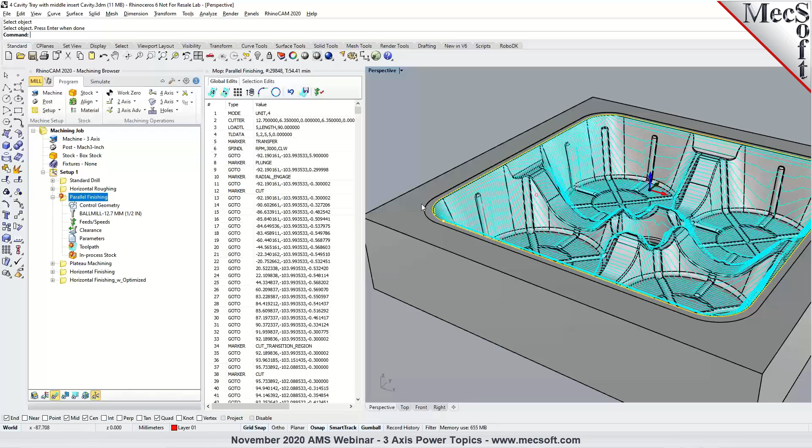So it'll basically move the entire toolpath down by the distance. There are also other tools where you can transform toolpaths, where you can rotate, mirror, and scale. In this example, we talked about how we can move the toolpath. You go to transform, set the move, and specify a distance, then pick OK. That moves the toolpath, and you can see it's now moved by a tenth of a millimeter.

One of the other ways you can use your toolpath editor tools is when you make a change, it automatically flags the machining operation folder dirty, telling you that you made edits to the toolpath, so you can post this out directly without having to regenerate it. If you regenerate it, it's going to undo the toolpath edits you just did, reverting back to what you had before those edits.

Now, let's say you had a part that requires a very long job run. It could probably run over several hours or overnight, and you may want to stop it and go back the next day to continue from where you left off. Rather than having to go back and reprogram and regenerate the toolpath for those sections, you can use the toolpath editor.

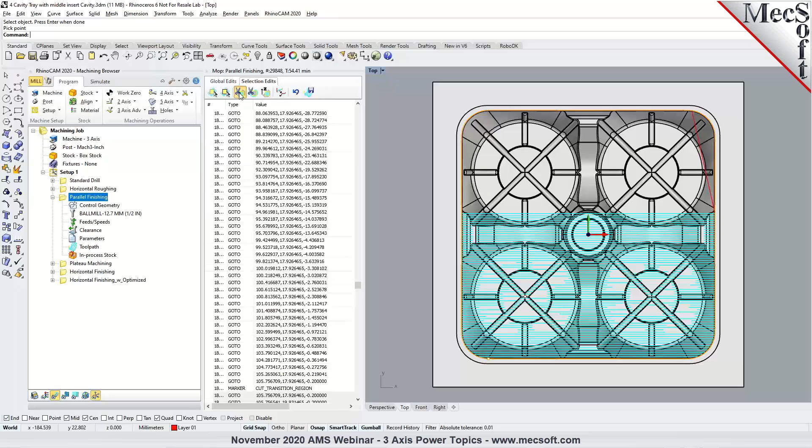Go into the selection edits tab, and you can select a section of the toolpath and delete it. For example, I can choose select cuts by picking a drag rectangle, and drag a window. In this case, looking down from the top view, I can select a section, drag a window, and those toolpath motions are highlighted. I can cut to eliminate those sections, trimming those toolpath sections out.

Then you can post it and resume cutting the next day. Or if you had a tool breakage and want to go back and continue from where you left off, you can use these toolpath editor edits to perform these tasks, so you can continue from where you left off.

You could also create a region for containment. So rather than picking just a drag rectangle, you could use a containment region. In this case, I'm going to draw a rounded rectangle, and use select inside a closed curve. I can pick the closed curve, so it automatically picks all of the toolpaths inside that section, and then I can choose cut to delete those sections, or I can even do isolate, which basically does an inverse of cut.

So these toolpath editor tools are available in the Pro and Premium configurations of our mill module.

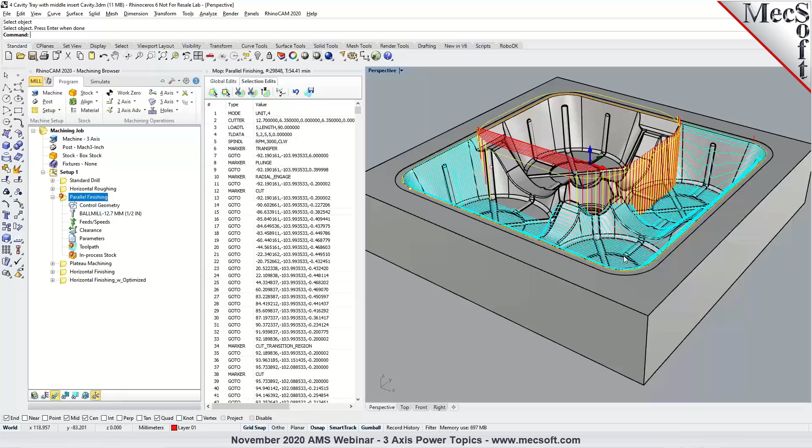Thank you, Uday. There was a couple of questions I want to quickly answer before we shut down. How do you do the Z-level display of the toolpath? There's a button in the toolbar at the bottom. Do you want to show that, Uday?

Sure, absolutely. As you select a roughing operation, the Z-level display works in most of the 2.5 axis methods and 3 axis methods, like horizontal roughing and horizontal finishing. The Z-level display would not be applicable if you're just doing a parallel finishing without step down. So if you have a roughing operation or a horizontal finishing operation, the first step is to select the operation.

Step 2 is make sure your toolpath visibility is toggled on. Once you have the toolpath visibility toggled on, you can select display toolpath in levels, and selecting this will display the Z-level display dialog, where you can step through the Z-level display. I hope that answers your question.